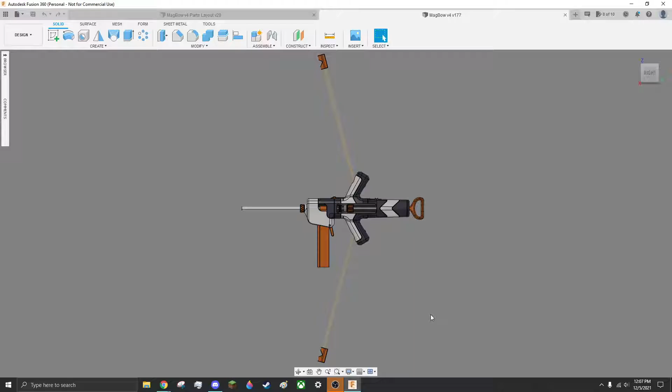So you pull it back, it catches the plunger. Pull it back, catches the plunger here, right on that sear. Then you release it. The bow arms bring the priming handle and whatnot forwards, chamber a dart, and then it hits this release arm, which lifts the sear and then releases the plunger, shooting a dart.

It feels all like one motion when you're actually using it, even though it's two distinct mechanical things. It's two mechanical motions, but it feels like one thing when you're actually using it because it's so quick. So files are released, open beta.

Sometimes if you don't have the bow arms bent back far enough when you tie the string, they don't have enough force to bring the mechanism fully forwards and hit the firing sear with enough force to actually release the plunger. That can be fixed by just making the bow arms slightly tighter and more powerful, like bending them back further before you tie the string.

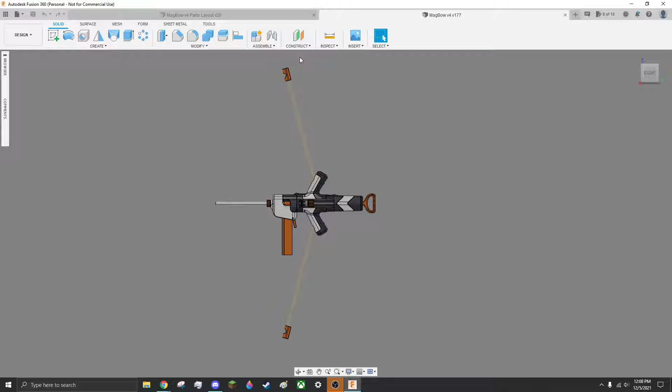There's a few things with this blaster that you need to make sure that you do. You need to not pull it back far enough to not catch and then release, because that will have a lot more force going forwards, and that might crack parts if you do it too much. But if you pull it back, have the plunger catch, and then release, it's pretty much fine to dry fire it like that.

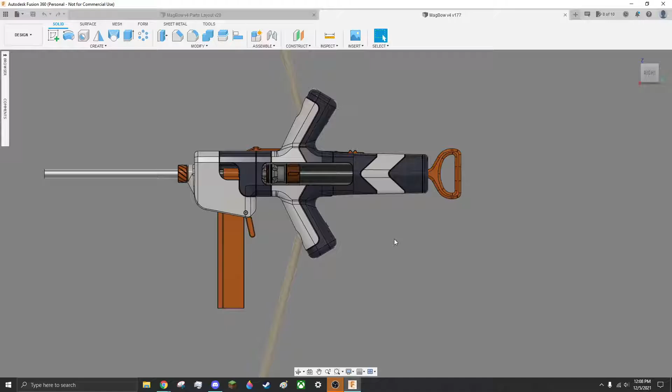You also need to, when you are done using the blaster, take the string off of one of the bow arms so they're not constantly under tension, because the CPVC bow arms will lose their springiness, and then once again it won't have enough force to bring the plunger fully forwards and fire.

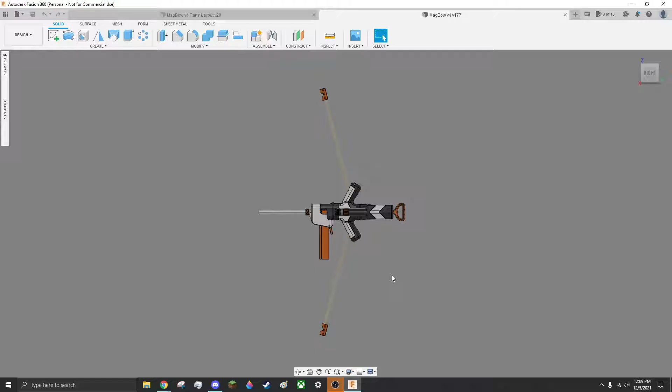Here are all of the prints and all the hardware. We got two grips, one for the top, one for the bottom. Got some of the bits for the back. Got a nice cover for the back that covers up the threaded rod. You got your magazine area, magwell. I'm really proud of this magwell.

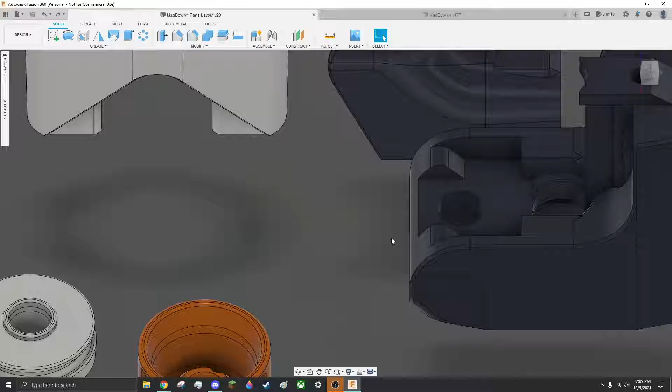It uses little plastic teeth here that go into there. So you only really need to use one bolt like this on the top to keep it in, even though there are two screw holes there and there if it is still loose, even after you use that one bolt.

This uses a Talon Claw length ramrod, but uses Caliburn length spring and plunger tube. It has two pieces of 42.5-inch long CPVC as the bow arms. It uses a Caliburn length barrel, 3 Caliburn length threaded rods, 1 Talon Claw length threaded rod, 1 Caliburn length threaded rod cover, and you need to use the aluminum one or else it won't have enough sturdiness, and the plastic ones degrade over time in the lubricant.

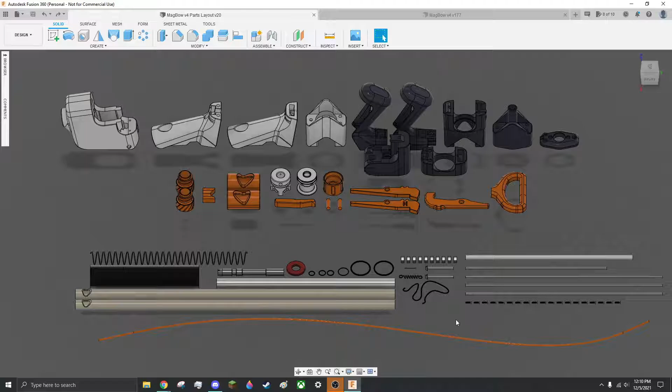Need a little bit of shock cord from Captain Slug, or you can just use rubber bands. That's for keeping the sear down. I need a nice tension spring for the sear. Little pin for the trigger to pivot on. 10 nuts. 2 of the longer bolt screw things that Slug has. 2 -123 O-rings, 1 -016, 2 -012 and 1 -011. So 11, 12, 16, 123.

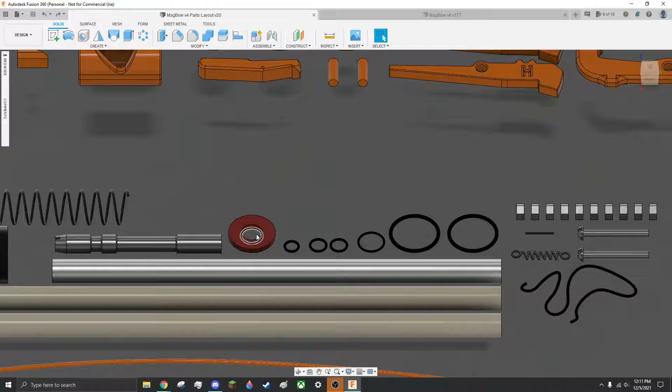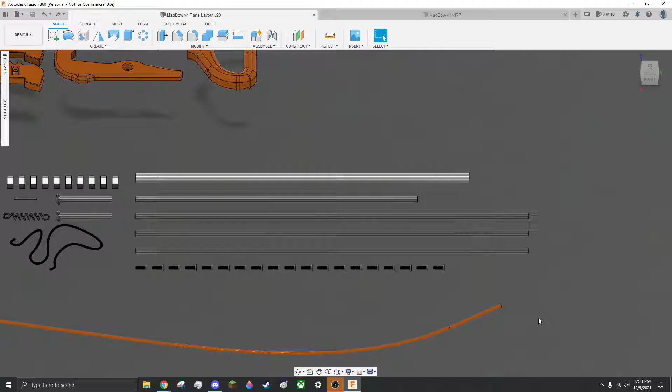It's not necessary, but you can have the nice little rubber pad for the front of the plunger right there. And then you need at least a 55-inch long piece of paracord as the bow arm string. And you can make that shorter or longer as need be to get yours to fire reliably. It depends on print tolerances and your environment and all that stuff. So, yep, and it has 19 4-40 small screws. Yeah, that's pretty much it.

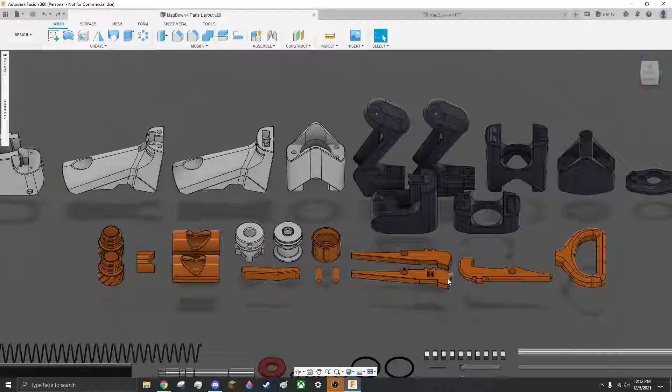If you're having trouble with it not catching, I recommend that you print this heavy sear. Do not print the heavy sear unless you need it. I recommend that you print the normal sear, and if it's not catching, use the heavy sear, and maybe tie your elastic a bit tighter around it.

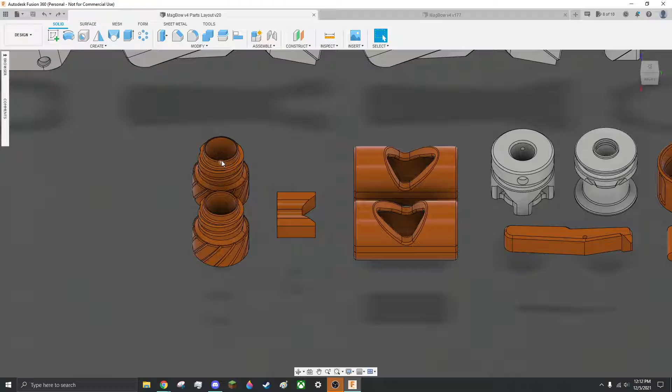And then there's also 2 barrel collets. So this is what holds the barrel in place. One of these is tighter than the other. I recommend that you use the tight one, and if that doesn't fit, then try the slightly looser one. The tight one works with Captain Slug and Kuryaka barrels. Yeah, I think that's pretty much it.

Blaster is released, open beta, because there's probably a few little tweaks to make, but you can now go download the files and build one if you want.